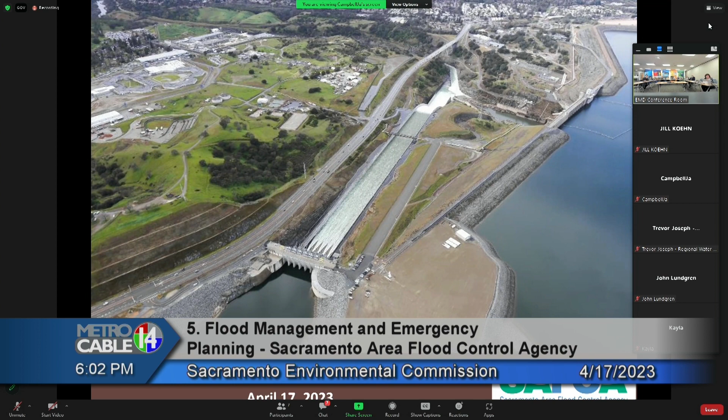What you see here is the Folsom Dam Joint Federal Project. On the left, where the water is flowing down, you'll see a little bit more of this in a few minutes. That's the new Joint Federal Project that allows us to really increase flows during storm events, to evacuate water from Folsom Lake during an anticipated flood or high water event. In the upper right corner, you have the historic and existing Folsom Dam. All of the Folsom Dam components, with the exception of the new Joint Federal Project, are currently being raised.

In just a second here, hopefully this will advance. There we go. So again, when we talk about Sacramento, I think we talk about historic floods. You may have seen these many times, of course - K Street in the 1800s.

Big issues. Leland Stanford was the governor at the time, and for his inaugural address, the story is that he was lowered into a rowboat so that he could go to his inauguration and give a speech. We have quite the history with flooding, having 2 rivers, and the wonderful Sierra Nevadas provide us a great reservoir of water, but it usually comes in the form of snow. Unfortunately, sometimes that snow comes down a little too fast on us.

So we want to make sure that we're not having these types of events in the future - that's what SAFCA is all about. As we move forward, there were 2 significant events that really created the formation of the Sacramento Area Flood Control Agency: the 1986 flood, and an item that came through with the federal government, where local cost share, or non-federal cost share, became a component of federal projects.

So in '86, those two events started to build up and make sure the local community was going to be prepared for dealing with flood improvements over the course of many decades. Those local cost share requirements are important because otherwise the federal government does not necessarily want to participate in other infrastructure components associated with it.

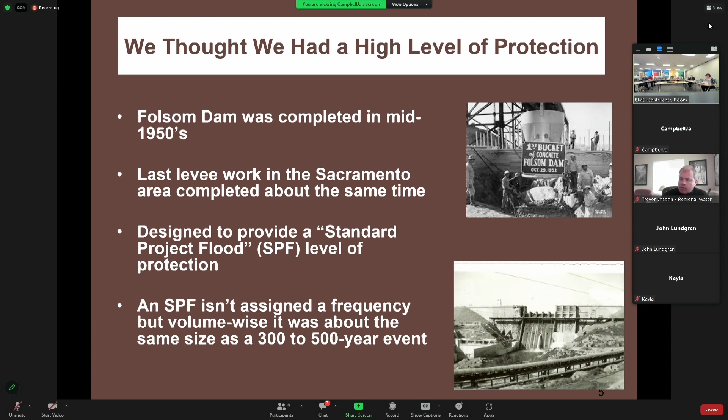At the time Katrina happened, Sacramento was sitting at about a 50 to 65 year level of protection. Before Katrina, New Orleans thought they were at about a 250 year level of protection. So that gives you an indication of where we are, where Katrina was, and how fortunate we have been.

So we now understand our risk is not necessarily fixed based on a specific model, but we have to make sure we have an idea of what flood could look like and how big the storms could be going forward. There have been three major changes in the urban levee standards and a few other things, because this is what we're working on.

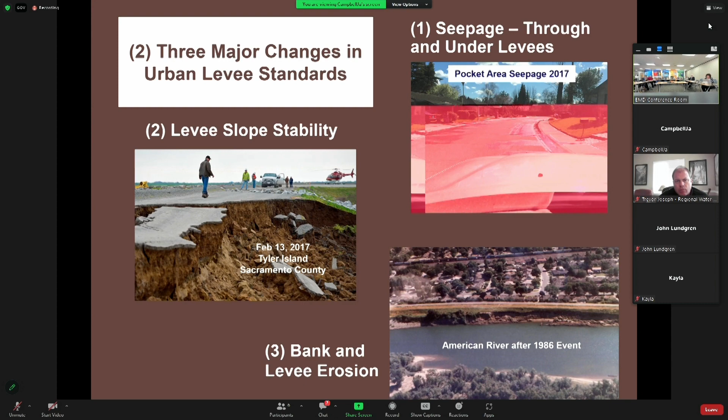These are the three main components on the levee systems, which represent three of the major changes we've seen since the systems were originally constructed. But as we move forward, we have learned quite a bit more.

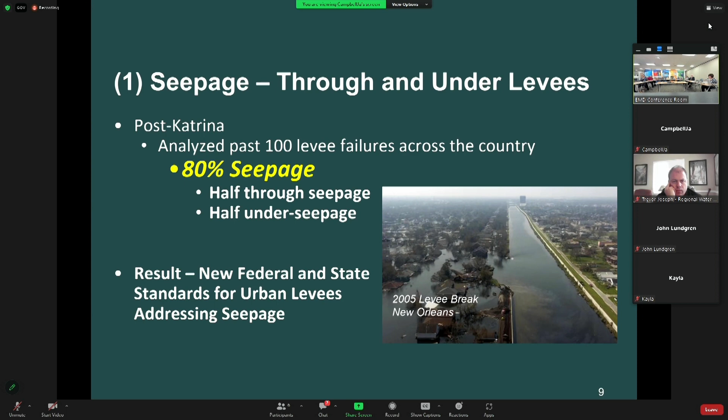Katrina helped us in a few different ways. In some ways it was obviously a major catastrophic event, but after Katrina, 100 levee failures were studied by the Corps of Engineers and other engineering firms, and they identified that 80% of the failures were actually through seepage and under-seepage—water traveling through and taking material with it through the levee, and water traveling under and taking material with it, causing the levee to collapse and fail. This resulted in the new standards that we are now constructing to.

Going back, our levees were originally built from sand dredged from the existing rivers—the Sacramento, as well as some material from the American. They were either brought in using barge, steam-driven barges, and ships that were basically drag-line sand, excavating and putting it into the levee segment.

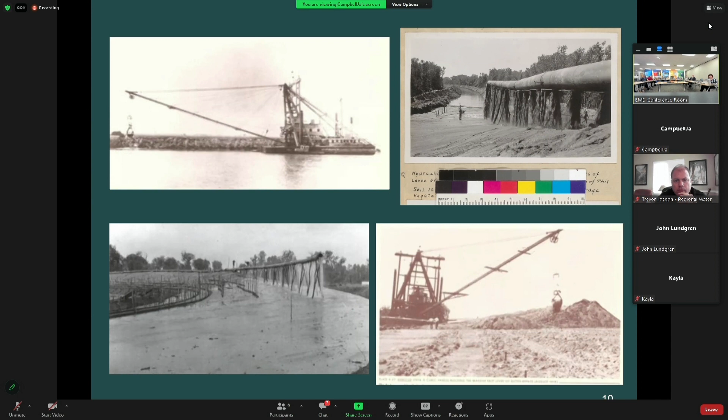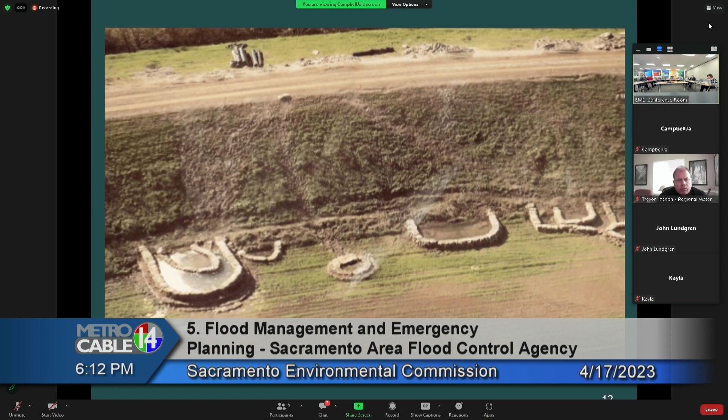We now have a number of different activities underway with the Corps of Engineers, the State Department of Water Resources, and the Central Valley Flood Protection Board, to make sure we're protecting against these things. This is an example of something that was going on in 2017.

Fortunately, nothing major happened here, but a couple things we like to show are that you need room to be able to manage and deal with the problems when they occur. When you get really close to the levee, sometimes it's not as simple to maneuver and take care of emergency operations, like moving material in to fix the levee, or just having simple access for visual evaluation during a flood event.

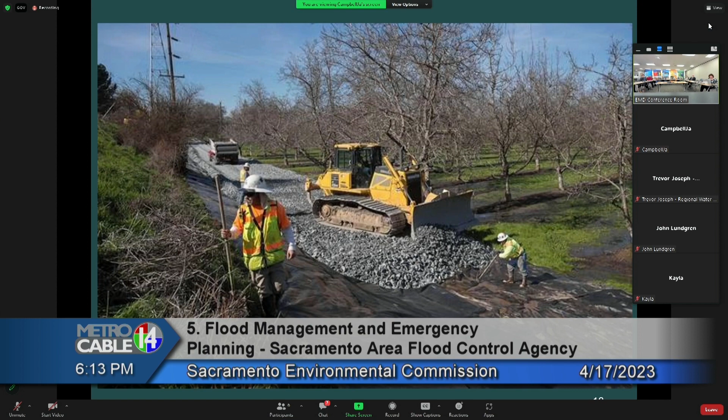So just a number of things here—I'm trying to build up to what our program is.

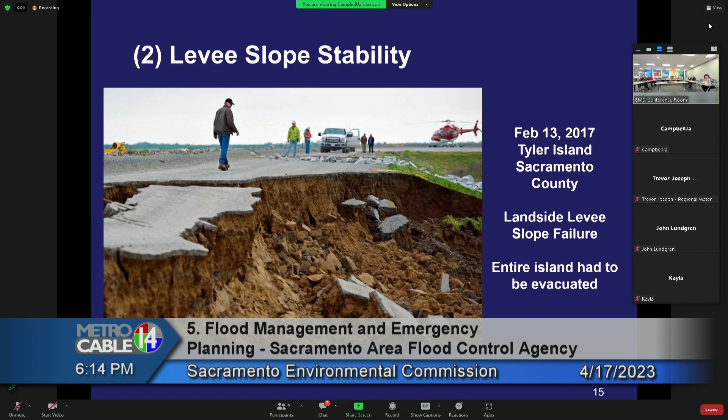As we talk about slope stability, some of these levees have sandy slopes that don't stick very well. This is on one of the islands - Tyler Island was evacuated during the 2017 event. This is an example of where the landside levee just got saturated and fell off. We're constantly working on these types of issues as we move forward with our projects. I apologize again for these pictures not translating very well. But sometimes it's just like what you see on the highways - these slopes, if they get too steep and the material gets wet, it starts to come down. The same thing happens with our levee systems, unfortunately. If those slopes are too steep, the material may fall away and become a problem for the system it's trying to protect.

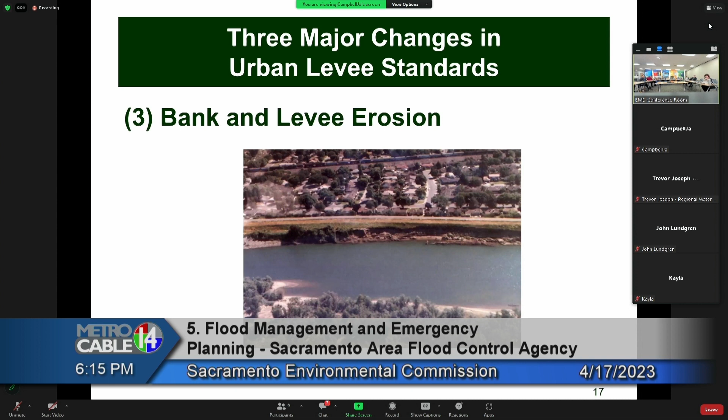Then, of course, we talked about levee erosion. This was the 1986 event that caught us a little bit off guard, but it really tells a story that is causing us to spend billions of dollars along with the programs.

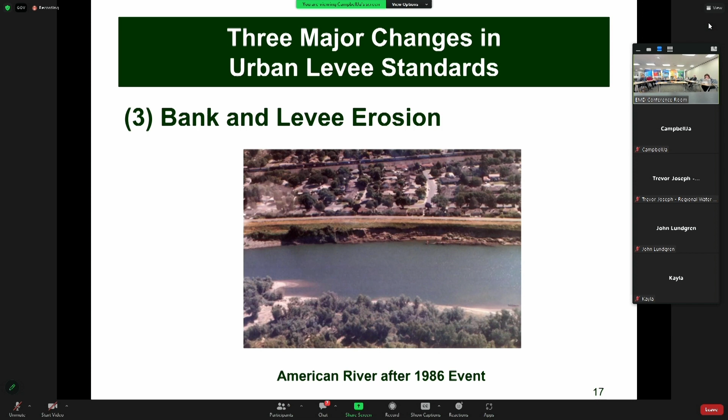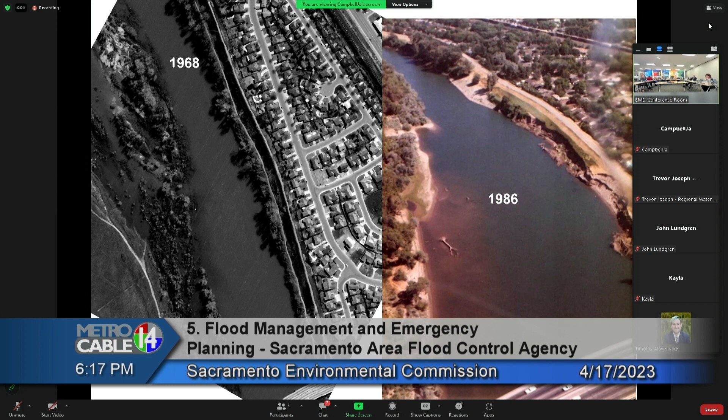So the SAFCA system is built around Folsom Dam, the main reservoir for us on the American River and the main point of flood protection for the community. We have 106 miles of levees and channels throughout the Sacramento area. Natomas is a complete ring levee - it's a giant bathtub - with the American River and tributaries feeding in prior to the confluence with the Sacramento River. Lots of levee systems, lots of effort has gone into making sure all these levees are able to perform, and to provide the components necessary to get FEMA mapping redone and meet the 200-year level of protection with the state of California. So a number of things at play here.

We also have the Yolo bypass on the far left. The Yolo bypass, along with Folsom, is our saving grace. It allows almost 500,000 cubic feet per second. A cubic foot is roughly the size of a basketball, so imagine every second 500,000 basketballs rolling by. That's what we're seeing happen in the Yolo bypass when it's in full mode.

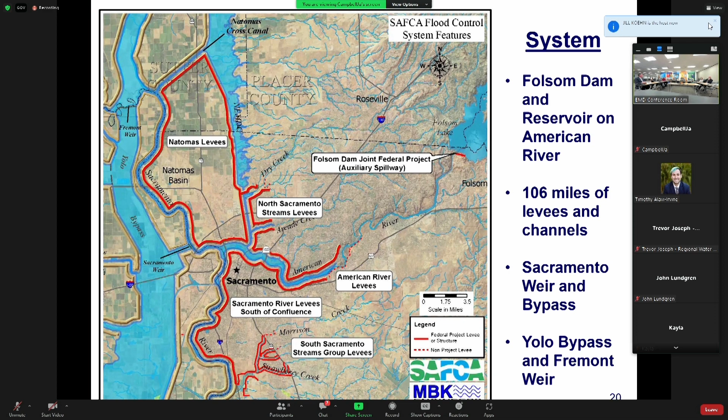So SAFCA, along with the state and the Army Corps of Engineers, has six authorized projects, and all six are funded and active. We have a little bit of... here we go. So we have six active projects, and some of them are approaching completion.

The Folsom Dam actually has three projects associated with it, all part of the same authorization. We are full steam ahead on getting all of our projects moving and keeping them going. Our responsibilities are to make sure the Corps of Engineers has the lands, the easements, the rights of way, and our cost share so they can continue to build their projects.

Currently, the authorizations for those six projects equate to $5.2 billion worth of work. The Corps of Engineers is responsible for $3.4 billion of that, and the state and SAFCA are responsible for about $1.8 billion overall. Those are old numbers, because escalation and inflation impact all of those things, and we're constantly working with our federal partners and congressional members to make sure projects stay funded.

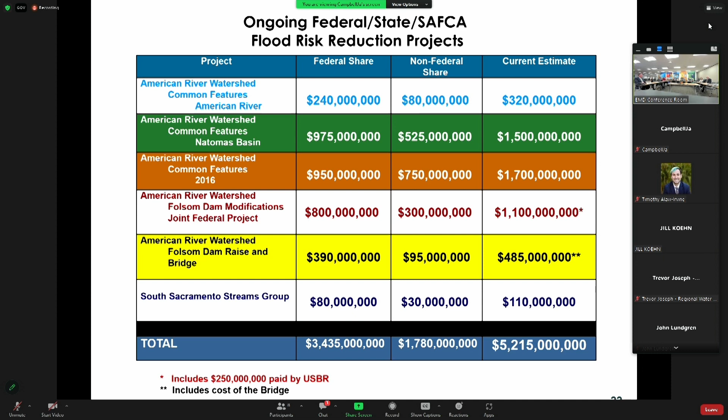So I talked a little bit about cost share earlier. On these authorized projects, the federal government provides about 65% of the overall cost, the state of California provides 24.5%, and SAFCA with local dollars provides 10.5%.

So ultimately, some of you who live in the Sacramento area may see a couple of assessments on your property tax bill. We're fully funded through those property assessments. We don't get any other supplemental funding for our cost share — it's truly just from those property assessments, as well as a development impact fee that covers those costs as well.

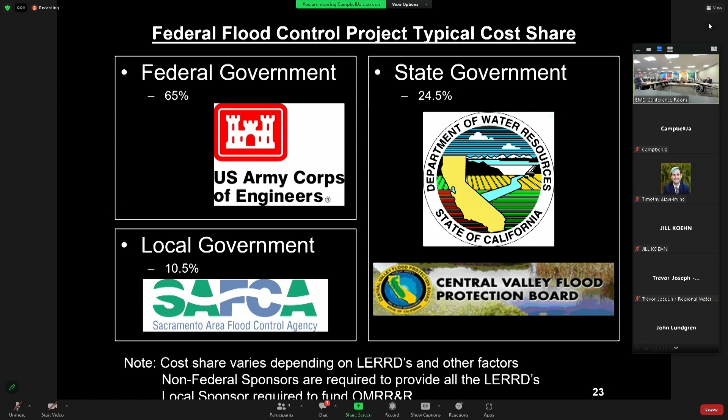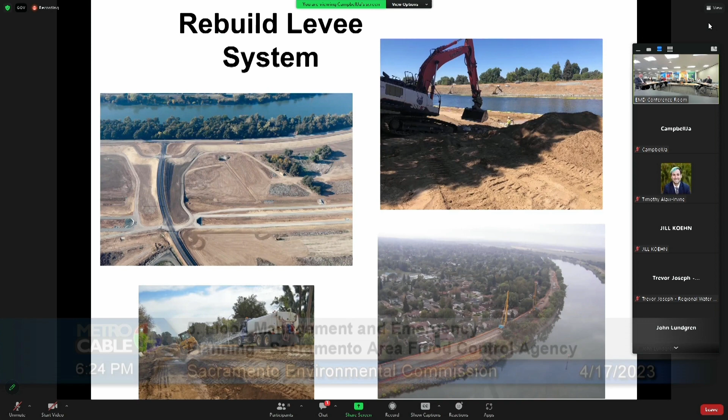You can see the bottom right-hand corner is a little bit different. It looks like something like a crane almost. And what that is, it's a seepage cutoff wall machine. Basically, it's a drilling rig that will drill down into the levee up to 135 feet deep, and it'll provide a slurry system, made primarily of bentonite and soil, some instances a bit of cement. Basically it's to stop the seepage of the water going through the levee and taking material with it, so it's slowing it down so that we can keep these levees intact.

So a number of different types of activities. The bottom right corner on that slide is a long stick excavator. They might go as deep as 80 feet - they might degrade the levee, bring the top of the levee down so they can reach down deeper with this excavator. And they actually just - it's like playing in the mud with the excavator, they will mix it up. Again, different type of method, but same type of effort to protect the system from having that seepage.

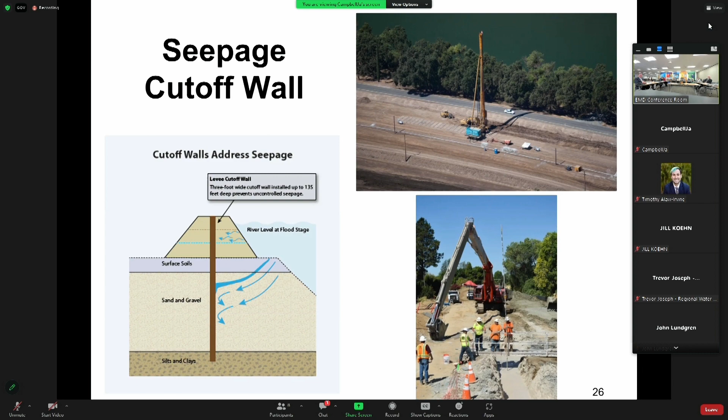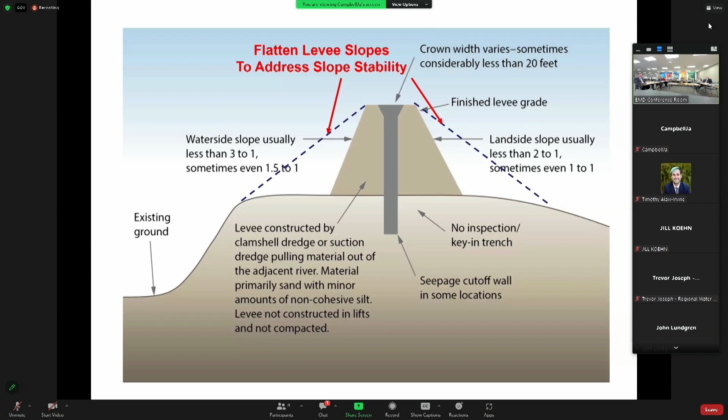Again, we also talked a little bit about the flattening of slopes. Many of the slopes that were created from the original levees were too steep. So as we go through these processes, we're increasing the ability for it to protect against that erosion from the seepage, as well as the sloughing off of the slopes, the soil, and again the erosion.

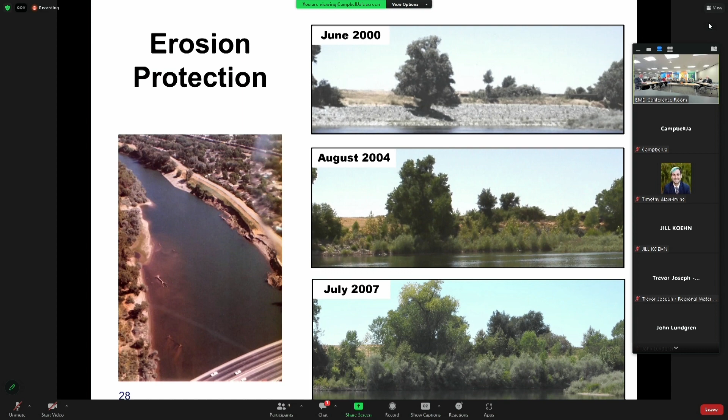And one of the big discussions we have about erosion - the first thing Mr. White asked me today was about vegetation on the levees. And so you could see in the top, shortly after that levee system was protected for the erosion with the rock, it was then also replanted. Soil went over the rock, it was replanted, and you can see over the years that segment of the levee pretty well vegetated. And this is the practice that we are continuing forward with on all of the Sacramento and the American.

So again, I mentioned the Sacramento bypass. The Sacramento bypass is intended to allow flows from the Folsom Dam down the American River and then make that connection so that the flows on the Sacramento River remain the same. I'll show you a little bit more about that - it's a little confusing, but there's a portion of the Sacramento River in a high water event where there's flows coming down the American, it'll actually flow backwards.

So it's kind of an interesting thing on that confluence. The water, if the water level gets high enough on the American, it will push up into the Sacramento bypass, and once those gates are opened, it will flow out into the yolo bypass. The interesting part is we're widening this - we're actually going to double that in the next year. It's going to get started, the bids were just awarded - actually, the bids just were open. Hopefully they will be awarded for the widening of the Sacramento bypass pretty quick.

And this is kind of the explanation as to what I was just describing. So with the Folsom Dam, we now have 115,000 cubic feet per second rolling down the American River. That's our current level of flow that we are anticipating. But with our new Folsom Dam and our new work that we're doing on the American River, that number is going to go up to 160,000 cubic feet per second going down the American River.

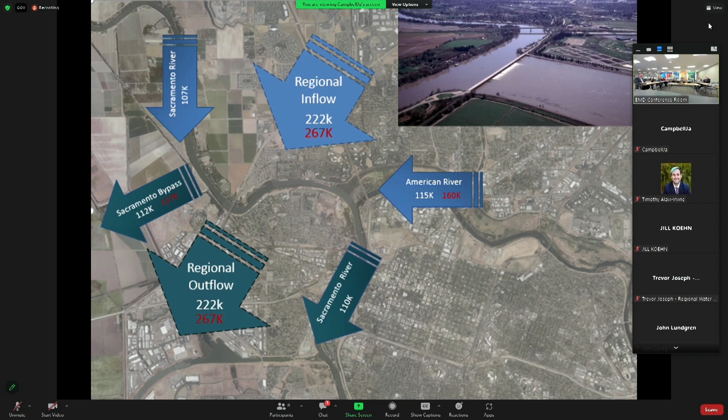So ultimately, we're just trying to make sure that bottom arrow there where the Sacramento River is flowing, those flows stay the same. So again, the flows coming down on the Sacramento are right around 110,000 constantly. Once it gets past the confluence of the American River, we want it to continue to be 110,000 constantly. So when we push more water down the American, it has to go out the Sacramento bypass. It's kind of a weird concept when the Sacramento River for that small segment flows backwards, but it certainly makes it a whole lot better for the rest of the folks down in the pocket area and beyond.

So this is a little bit of what we're working on. The existing green on the left side is the existing Sacramento bypass, that's an operated gate. We see on the news when they get flows high enough, the Sacramento group over for the DWR maintenance office will go out and pull those gates when it gets to a certain level. The new weir, which is going to be going in, is about 1,500 feet long. It's a fixed weir, so no operable gates. Water levels will rise to a certain elevation, and then it'll just spill and go on out into the Yolo bypass.

Included in the project is a very large fish passage, and this was part of the design, so we can get rid of fish entrapments and other things associated with green sturgeon or other salmonids and other types of fish that are near and dear to the community and our hearts as far as making sure that the fish population stays intact.

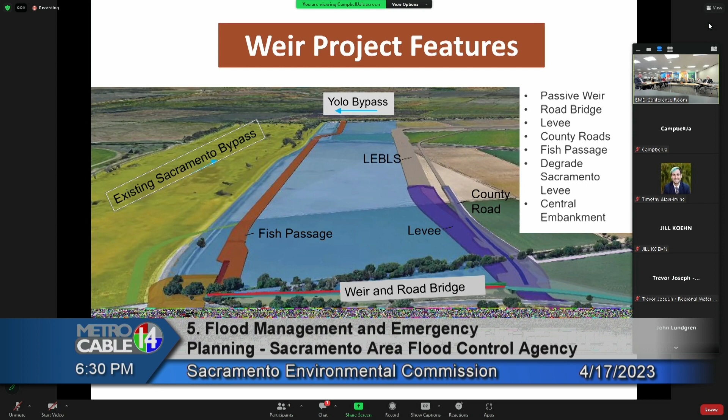In addition, there is a widening taking place of the levee system, not only on the Sacramento bypass here, but up on that corner, there is a widening of the Yolo bypass occurring. This is what's called the Lower Elkhorn Basin levee setback. The state is performing this work, called the LEBLS Project, just because it's a big mouthful. But ultimately, it's the widening of the bypass by about 1,000 feet.

The issue we had was SAFCA had to go in and relocate a landfill that was in the Sacramento bypass. It was an old burn pit landfill, called the Bryte landfill. We worked with the state of California to relocate it, and you can see the relocated landfill is now in what's called a corrective action management unit. SAFCA is now owner of that relocated landfill, and we're going to turn it into a corporation yard for the reclamation district that will be maintaining those levees.

So again, the Sacramento bypass levee is going to take that turn, and then that new Yolo bypass levee is being constructed by the state of California. All under the auspices of getting more water out to the Yolo bypass and then mitigating those impacts in the Yolo bypass for that additional flow.

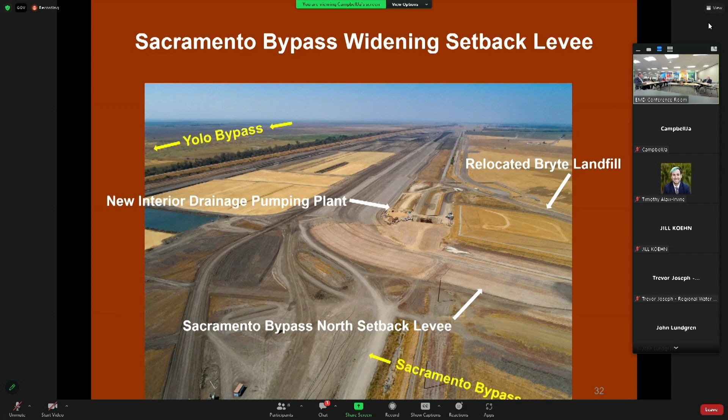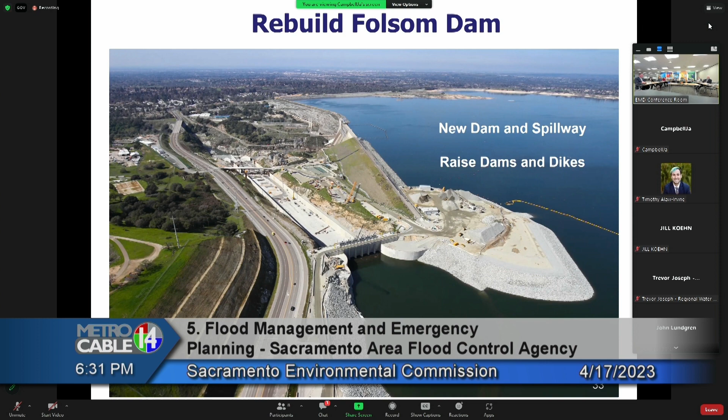I mentioned earlier, Folsom is our first line of defense from the runoff on the American River from the Sierras. So we did have the new dam and spillway, as I mentioned earlier. We're also raising all the dams and dikes around Folsom by 3.5 feet, which will create a little bit more flood storage space. This is the new joint federal project, the new dam and spillway, which has all the gates operational.

I know there was a little bit of news not too long ago, somebody saying something was wrong with the gates. No, the Corps of Engineers had a construction defect on the coatings of the rods, the hydraulic cylinder rods, and the coating wasn't going to live its life expectancy. So there's a little bit of work going on that was just awarded to make sure the coatings on those rods will be replaced. $16 million the Corps of Engineers is paying for that to occur.

But these gates are all operational, and they will remain so, with the exception of one gate at a time each year coming out of service so they can replace those rods. Ultimately, a tremendous amount of water can flow - well over 200,000 cubic feet per second can come out of Folsom between all the gates. We probably won't ever have to get to that, let's hope. But there's quite a bit of capacity and redundancy built into the system.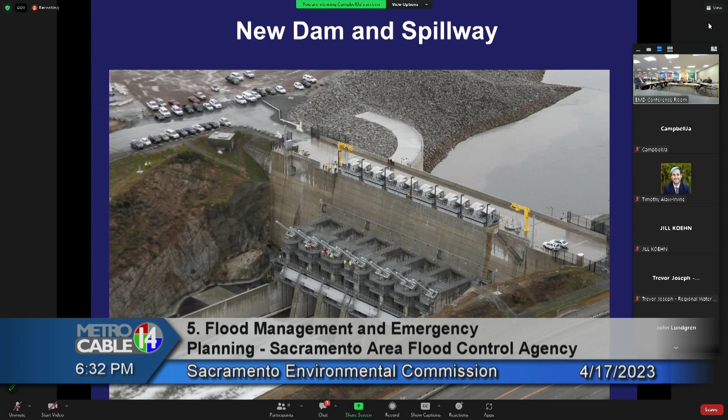When that project was constructed, the discussion was how much concrete went in there. We always like to throw this one out there: 29,100 concrete trucks. We lined them up from San Francisco to Reno, be solid concrete trucks. Kind of an interesting, nice little fun thing, but moving on.

The purpose of that new dam spillway was that we needed to lower the gates 50 feet. The idea is that if you wait too long, if you wait for Folsom to fill up, you can't get the water out of Folsom fast enough to create space for a flood. So when we have big flows coming in, we need to release early, and we'll need to have a whole different works to make that happen.

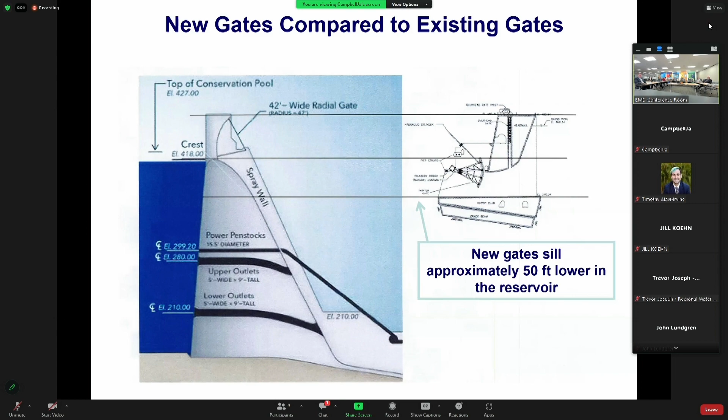So these new gates went in 50 feet below the original dam gates and other infrastructure there. And what that does, this comes through all the way. We have what's called a water control manual that provides us the instructions on how to operate the facility. Basically, the water control manual gives us ideas as to how much water is coming into Folsom and how much needs to go out based on snow melts, precipitation, and expected weather.

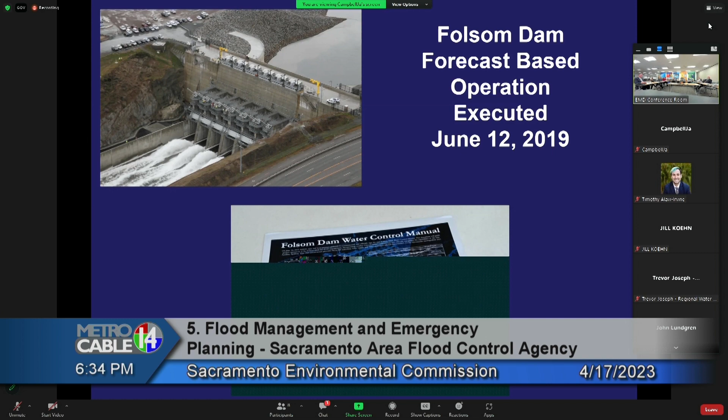So we do a weather forecast. Well, we don't, but NOAA does a weather forecast, and they communicate with the Bureau of Reclamation and a number of other individuals so that we can help identify how much space needs to remain in Folsom so that we don't flood. So this is a very interesting process.

Before the Folsom modifications were done for the joint federal project and that new spillway, every year when we got to December, they would evacuate a bunch of water. They would bring the levels down, taking it to almost 67% empty. And then there's this variable space that you're talking about.

So if we look at the red areas, that's what the old model is, if we're trying to talk about flows here. Folsom has about 1 million acre feet of capacity. We would take it down to about 670,000 acre feet if it was going to be a big year. And then we would hope it would fill back up. It was a model for decades.

The new diagram allows this variable space to get managed a little bit differently based on forecasts and other efforts. Basically what happens is it allows the operators of the facility to hold on to the water a little bit longer and make judgment calls on how much they could fill and how early they can. I'll get a little bit more into that here.

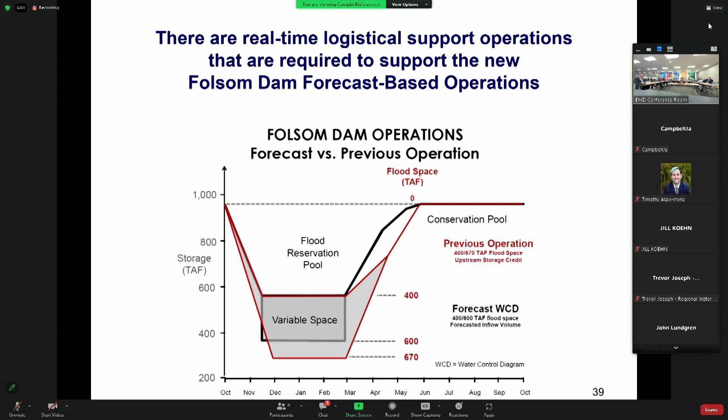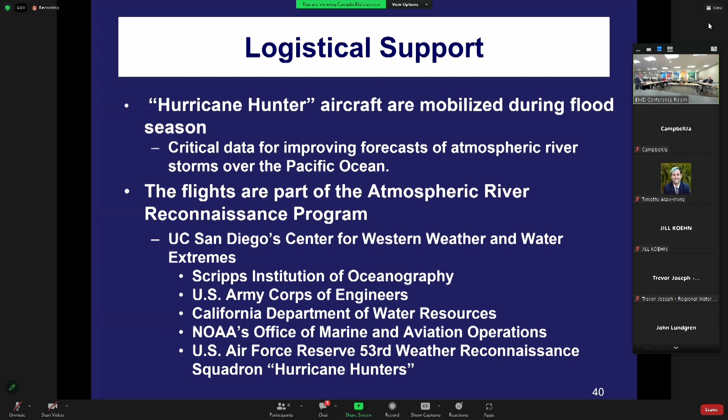Hoping I'm not confusing you all, but along with that diagram, the federal government has instituted a whole bunch of support associated with these new storm events we're seeing. We're hearing about atmospheric rivers and bomb cyclones and other things, and atmospheric rivers are a big deal for us. The federal government now has what they call the hurricane hunters that you see on the East Coast. They now come out to the West Coast and provide the reconnaissance program to help us with forecasting for reservoir operations. These operations are underway with our new water control diagrams, and there are a number of cooperations and other entities involved that help us bring this forward going into storm season.

These atmospheric rivers, on average, we're anticipating carry roughly 25 times the amount of water vapor and water that are in the Mississippi River. So we have a number of meteorologists and scholars that are very in tune to this right now, and it's quite interesting.

I have to say, we were at an event not too long ago, and the forecast for this year was a dry year. It was a La Nina year, and the expert giving his presentation on these atmospheric rivers said, well, we got surprised - we would have never predicted this. That's like with any of our predictions, but there was a volcano eruption in Tonga in January of '22 that put more water vapor in the stratosphere than they had ever seen. So there's some speculation that may be the cause of our atmospheric rivers this year.

It's kind of an interesting dialogue and discussion, but it also supports the fact that we need robust flood protection, because predictions are even sometimes a little scary that things could be coming our way. Something like a volcano erupting halfway around the planet might cause it - I don't know if it's the butterfly effect or what. Anyway, sorry for the digression there.

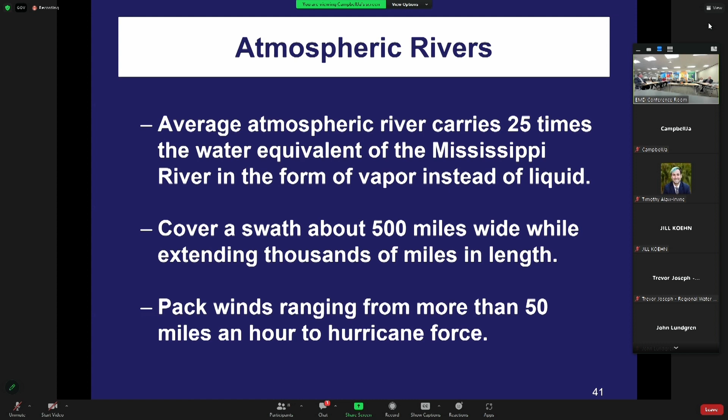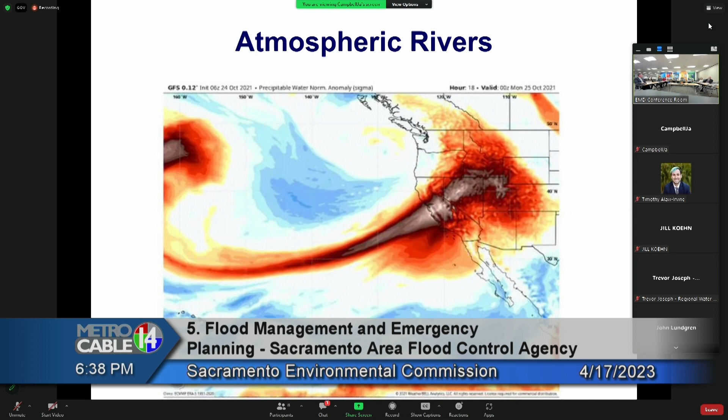We have a number of these atmospheric rivers that come. We're seeing it this year, so I think everybody's probably been paying attention to that. I don't want to talk about that too much more, but this is what they look like. We just have to understand that this is the goal - we're trying to protect the community against these efforts. So we are continuing with the 500-year level of protection. We have these partners with our friends doing the storm hunting and whatnot and helping with the predictions of the weather.

No matter how flawed the systems may be, any good information that we can keep building upon helps us. NOAA and others help us create these plans to manage these reservoirs and other operations.

Folsom Dam is being raised by 3.5 feet. There are a number of dikes, the main dam, and the left and right wing dams. All the structures are being raised. We're about 40% through that process with the Corps of Engineers currently.

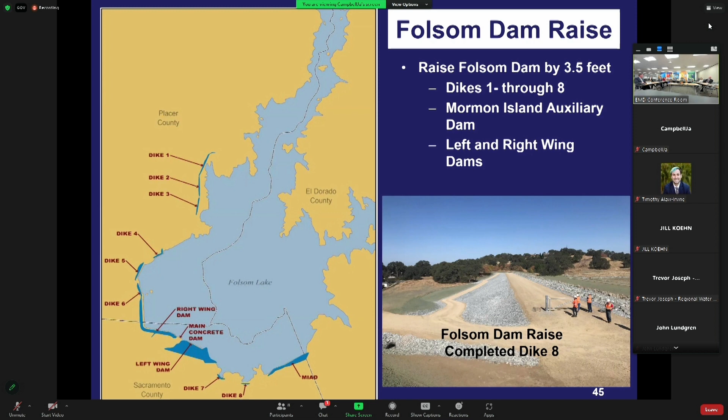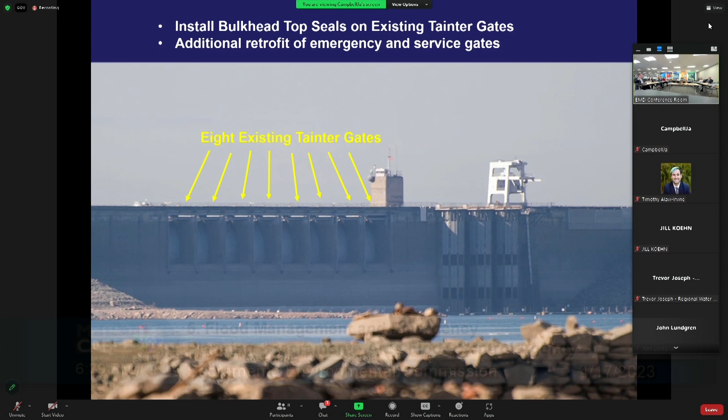Along with that, you can see the original gates on the original dam. You see that little bit of light across the top, probably about 8 feet. So we're putting top seals on those gates so that in a severe weather event, there's more space above those gates so we can hold more water longer. Just anything we need to do to protect the community below.

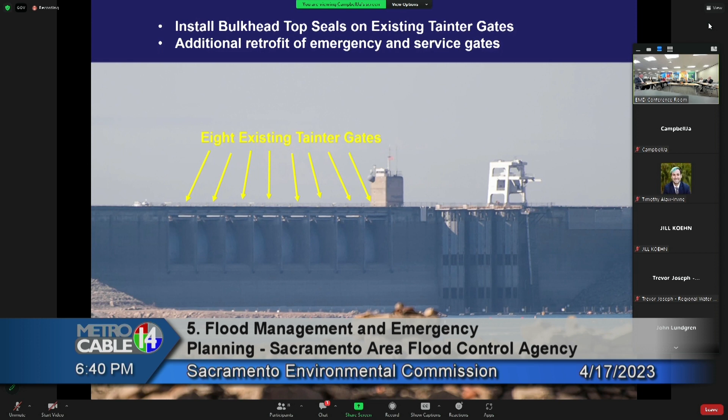The idea is that by sealing those gates, you don't create a dam safety issue where water is falling over the gates or on the backside of the structures and creating problems. That's just a portion of this we'd like to share, that we want these systems to be robust, above and beyond what you might expect through the normal weather being predicted. This kind of talks about where we're at.

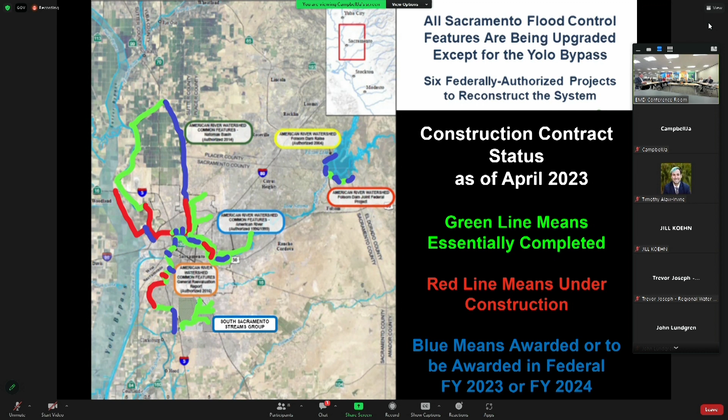Construction contracts—there's a tremendous number of contracts out there going on currently. Every aspect of our system is under construction for those authorized projects. We're touching each and every one of those. You can see most of the construction is either underway or complete. We have a few where the awards are happening now. We're really looking forward to getting all these projects done.

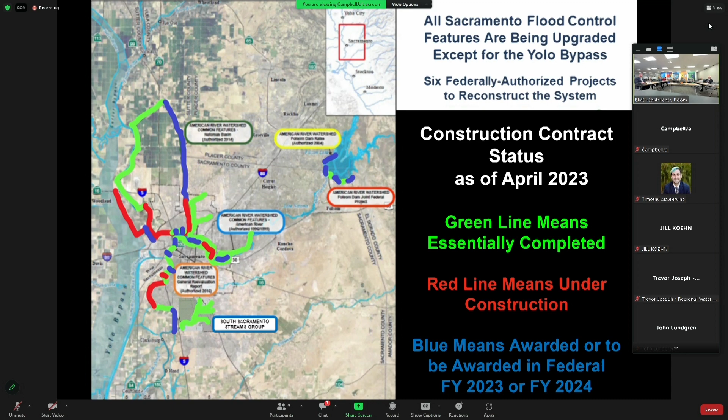Once we're all said and done, we believe that with the projects we have in place currently, moving forward, we will have over 300-year level of protection under the current standards, based on the current water guidelines and manuals.

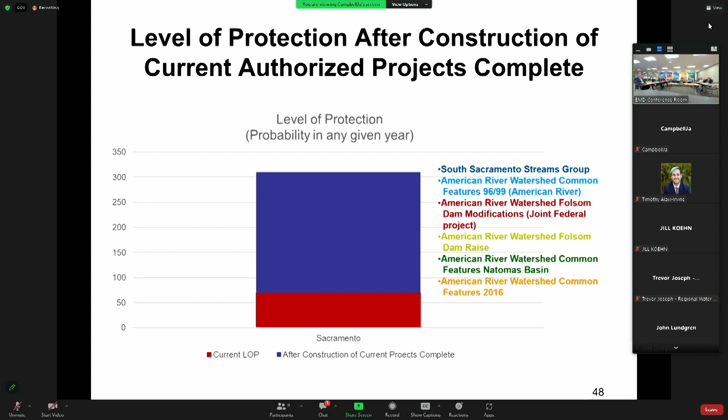But this is the thing I wanted to share a little bit about in regards to our weather and whatnot. For the current year, we've had some pretty decent flows. We all know we've had some good weather, hopefully got us out of the drought completely for a while. But the peak stage on the Sacramento—we didn't get to flood stage in March.

We barely squeaked into monitor stage as you go across there. So you can see the peak stage of the storms this year on the Sacramento was 27 feet, and the other was 28 feet of elevation at the I Street Bridge. The channel capacities—peak flows in the storms were about 79,000 to 83,000. We cap out about 110,000, that's the big peaks.

On the lower American, you can see the two storms. Ultimately, the peak releases from storms coming out of Nimbus were pretty small compared to what we could do. If you just look at the peak inflows between the two storms we've had recently, that's 106,000 cubic feet per second going into Folsom in the December-January timeline, and then the February-March storms had a max inflow of about 44,000 cubic feet per second. Really not a whole lot for us, right?

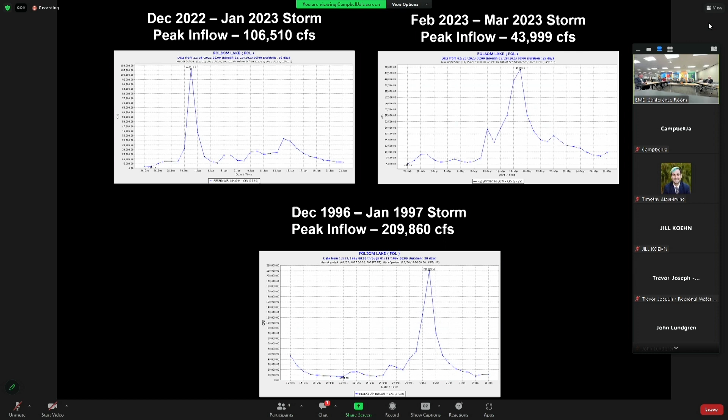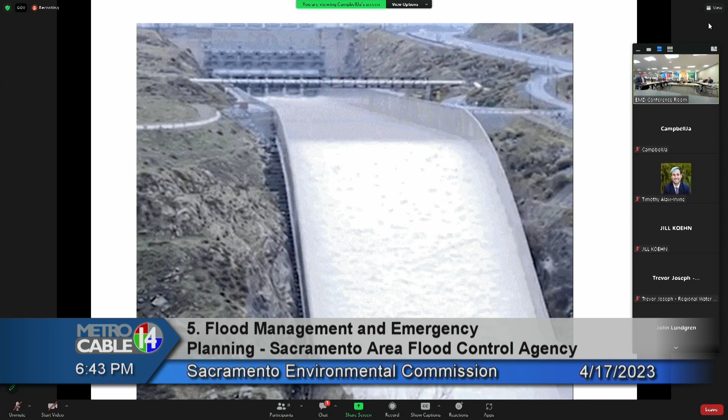Rick likes to show this—he loves the Joint Federal Project. This is about 20,000 cubic feet per second flowing out of the Joint Federal Project. Still, that's not a lot of water in the grand scheme. It's a lot of water, but not a lot for the flows. If you can imagine, we can go up to 160,000 down that spillway if need be.

So just rolling along here, I know I'm taking a bit of time, I apologize. As we get to our forecast informed programs, we start to take a look at this flood pool.

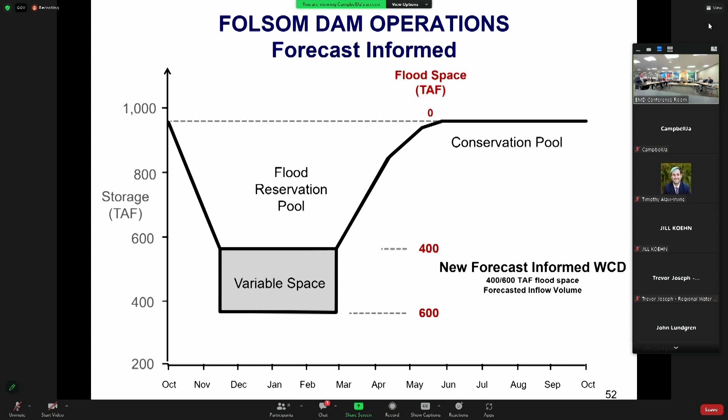So when we get to the top of that gray box, the Bureau of Reclamation is trying to balance. They're trying to figure out where are we at on the calendar, how much room do we have. We've got a huge snowpack, we've got to maybe make some room.

So this is a great example, the first real example that we've been able to share since we started these operations. If you follow that red line, it looks like the image I was just showing you, and you can see right in the middle where all the blue and the red start to mix together.

So the Bureau of Reclamation took it down to the top of that gray box on the previous slide. Here, I'll just go back. They took it to the top of that gray box in that variable space, and you can see it following along.

Then we get to those storms right around New Year's. You can see they started to dig a little hole in that red line, just a little dip down. They were releasing water in anticipation of more forecasted flows based on the snowpack, the temperatures, and what's happening. And you can see those flows came in, that blue line, and the red line bounces back up to where that flood pool top elevation is.

And then we got another storm. So they dug another little tiny hole, trying to manage and equate how much room do we need. Because we don't want to release too much water, but we also want to make sure we're not holding too much back. So you can see how this is actually functioning.

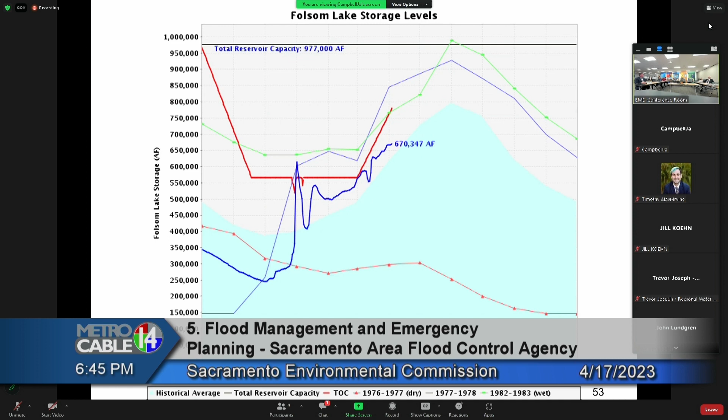I apologize, I don't remember the date of this document, but it's like last week sometime. Anyway, you can see now we're well above. As we get closer to April, they're starting to fill the reservoir again. We're getting out of the flood season. Even though we got a massive snowpack up above, the Bureau and the partners recognize that we're in good stead, we've got space to handle the waters and flows coming in.

But the anticipated flows coming throughout the year are going to be probably three times what they would normally be in a September timeline. We still might see 3,000 cubic feet per second going down the river when we're usually less than 1,000. So it's a considerable amount of water being held. But again, a lot of activity, protection, influence from others, effort on the federal government side, a lot of money. We're starting to see some results here. It's looking promising.

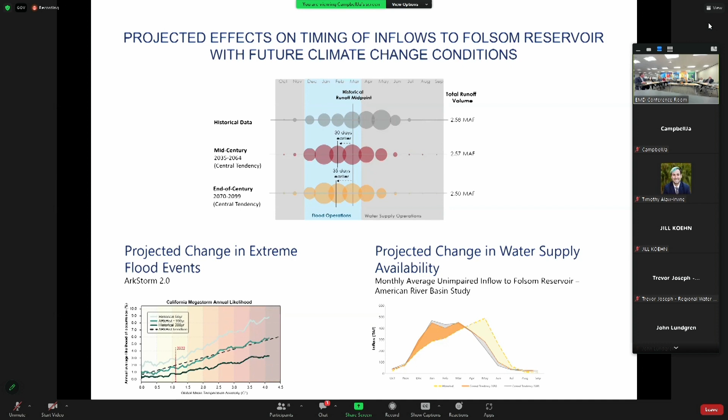Our major components—planning to improve the system to handle a 500-year event—is a surrogate for saying we need to build capacity and capability to handle these big events. We haven't seen a 500-year event, but a 500-year becoming a 200-year, these changing dynamics about how much water we're going to see, we need to keep an eye on the ball. We're going to stick at the 500-year mark and keep marching toward that, continuing our efforts to keep these system improvements going.

The major components—we put together a plan in 2017. These components protect the American River Channel. We've got to get those flows up to 160,000, so we need to widen the weir and bypasses, and we need to arrange for flood storage in the upper watershed. That's something we haven't talked about yet. As we get above Folsom, we look at the different reservoirs above. These are not reservoirs that are part of our normal system in the sense that we have any function or operation over them—they're private.

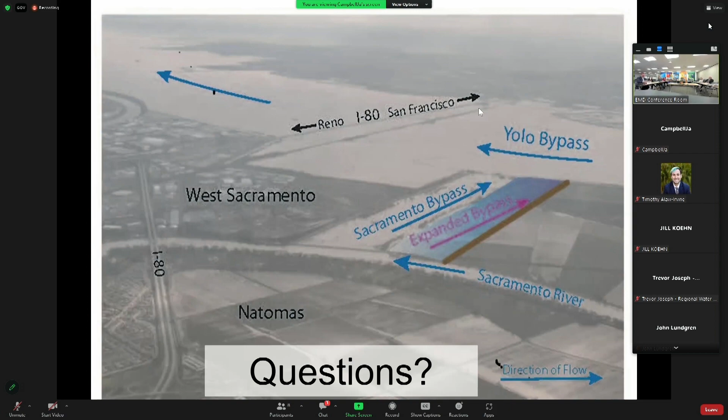So we're having conversations about increasing different operations, similar to what we're talking about with Folsom—making changes to the Folsom operation that includes some modifications potentially to how those operations of those three reservoirs occur, whether there's new dams or gateworks or anything above needing to be done. We're working with those partners to study that, and they would also need different operational changes that would allow them to release or hold depending on the situation, based on forecast-informed systems.

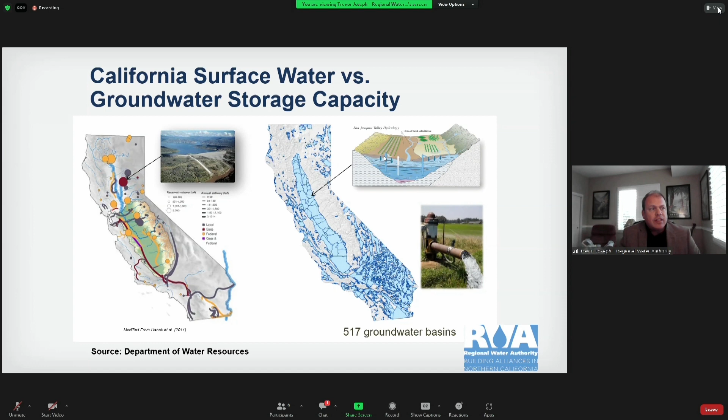With groundwater, as I mentioned, it exists kind of in this trough of sediments. Again, the Central Valley is this really huge trough that's been broken into many different subbasins, but really is connected in terms of the flow of water.

And then all these other blue areas are also groundwater basins throughout the state. The non-blue areas are those more hard rock geology—obviously the Sierra Nevada's coastal range—where not really any meaningful amounts of groundwater exists.

Amazingly, all these tiny little basins out here in the desert area, the Mojave, they are technically groundwater basins and have groundwater, but really there's almost no use of groundwater in those areas.

So when we look at surface water—and I'm a groundwater person, so I'm always comparing groundwater favorably against surface water.

Surface water—all of the major surface water systems in California, this is borrowed from the Department of Water Resources, I used to work there years ago. But when you add up the capacity of those major surface water reservoirs in the state, it's about 50 million acre feet. And of course, the prior speaker spoke in basketballs—one cubic foot.

With water supply, it's in acre feet, as you might be familiar with, which is really an area of a football field flooded 1 foot deep. So that's an acre foot of water—1 acre foot. So all the reservoirs can hold about 50 million acre feet.

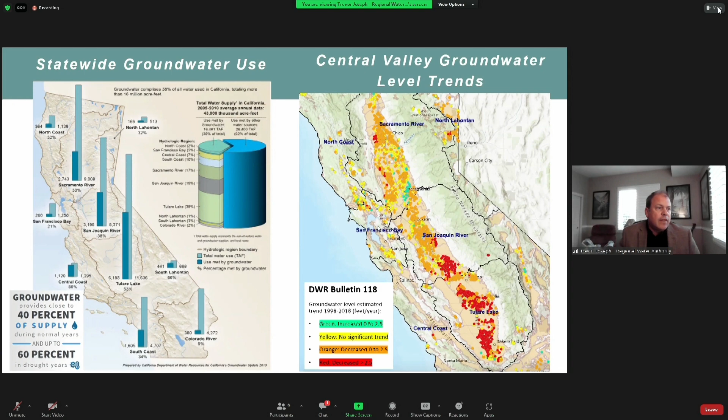So I'm going to switch over to the Sustainable Groundwater Management Act. By a display of hands, how many folks have heard of SGMA or feel they know a fair amount about SGMA? All right, fairly quite a few.

So I'm not going to go through all the detail. I actually worked on the regulations, not the law, but I was the first employee hired at the Department of Water Resources to help grow the group. My responsibility for about a 3-4 year period, until I left, was to get the regulations in place and some of the early implementation activities going.

So with SGMA, really the key here is that local agencies are encouraged to manage groundwater. And if they can't, then the state board can enforce the management of groundwater or take over the management of groundwater. The state board - not the Department of Water Resources - would be the one enforcing a potential management of water, but only after the Department of Water Resources makes a determination of whether local agencies have essentially come together and developed a groundwater sustainability plan that will adequately maintain or achieve sustainability over a 20-year period.

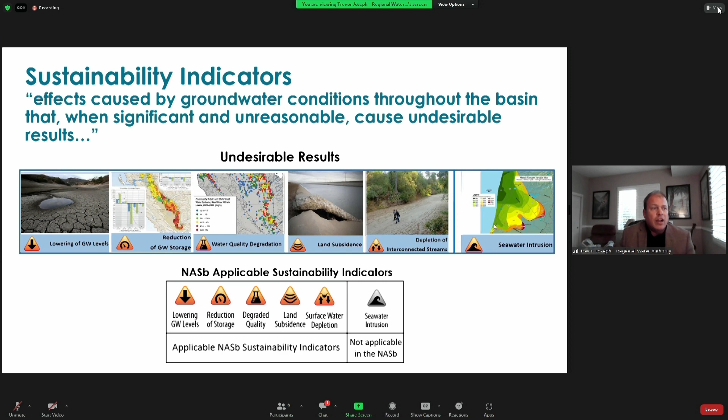So under SGMA, sustainability is defined through what are called sustainability indicators: chronic lowering of groundwater levels, reduction of storage, water quality degradation, land subsidence, depletions of interconnected streams, and seawater intrusion. These have been coined the 6 deadly sins of SGMA. If you are having significant and unreasonable levels of negative effects, as stated in the law, related to these, then you are not sustainable.

And you need to either correct those, or if you can't, the state board may step in. For the North American Subbasin - the basin that I manage, just north of the American River all the way up to the Bear River, I'll show a map in a minute - there's no seawater intrusion. So we're left with 5 deadly sins, as every basin throughout those 107 has to address and avoid these. That's the metric for how sustainability is defined, and I repeat myself because that's really important.

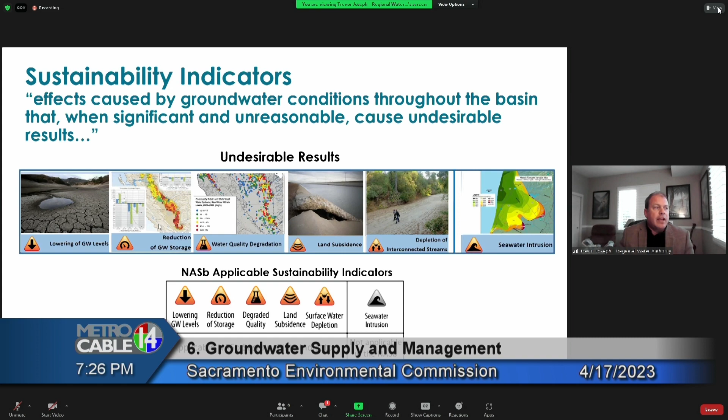So it's not just some sort of mathematical exercise of a water budget or balance for the basin, although that's important - this really gets at site-specific impacts and ensuring that these beneficial users of groundwater, shown here, have their considerations met to the extent possible in managing groundwater.

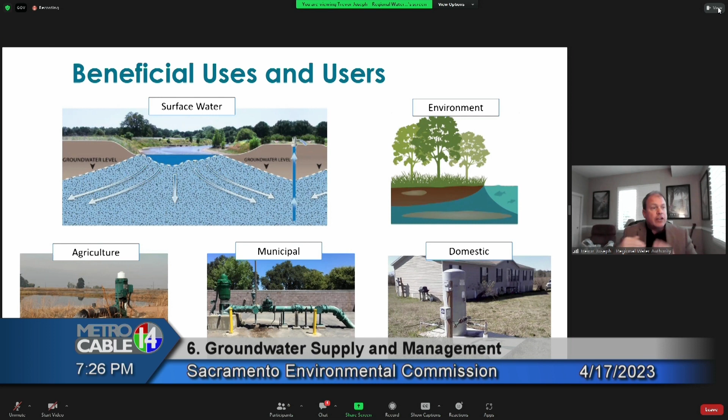So there's agricultural, municipal, and domestic users, and the environment, normally found in groundwater dependent ecosystems - plants and aquatic life that need a groundwater table high enough to interact with and maintain that plant life. Surface water depletion can also have an environmental impact - this is the situation where groundwater pumping occurs where there's interconnected surface water and groundwater, where you're actually pumping groundwater that draws water from surface water features and either causes negative effects to the environment or affects downstream users of that surface water.

Those downstream users obviously do not want agencies to pump all their groundwater and be left with less surface water that they may have a right to. So those are the beneficial uses and users that need to be considered.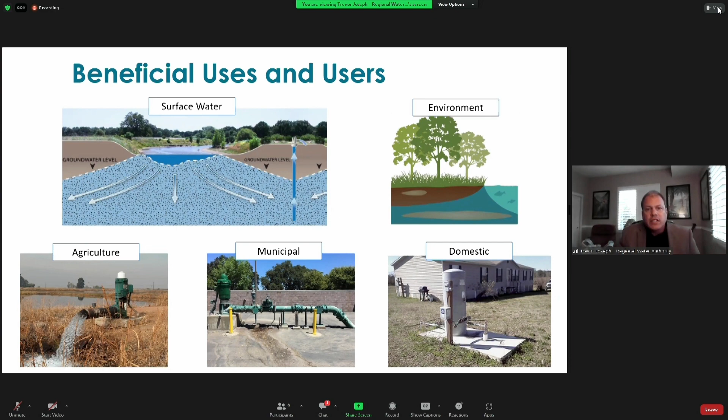I won't go into the details of a groundwater sustainability plan too much, because many of you have probably participated in the development or worked through that process with different groundwater sustainability agencies. But again, those 6 deadly sins of SGMA, determining what levels and how that's going to be managed, is really important - getting that right in those plans.

So I'm going to share a little bit, because when I'm wearing my Sacramento Groundwater Authority hat, I'm managing this groundwater sub-basin with 4 other groundwater sustainability agencies. I work for the Sacramento Groundwater Authority, this green area, but working with these 4 other GSAs, we're managing - and we're the lead agency, if you will, with DWR.

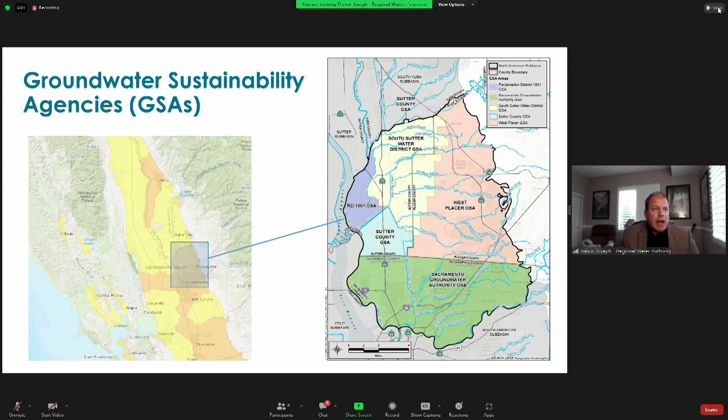We're all collectively the same in terms of hierarchy, but we're helping administer this on behalf of these agencies. This is bound by the Bear River, the Feather River on the western side, the Sacramento River, and of course the American River. This contact here on the east is where essentially the foothills, the granitic rock and other hard rock, meets the groundwater basin.

I wanted to just again display how that chronic lowering of groundwater levels, that sustainability indicator, that one deadly sin of SGMA, how important that is.

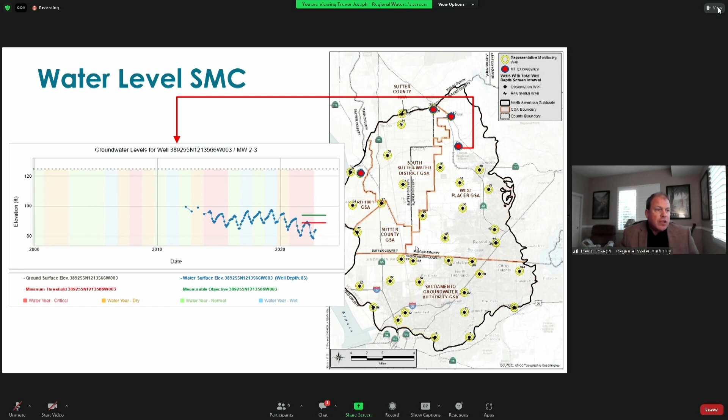In the regulations, what's required is that agencies define minimum thresholds at different locations. These yellow dots are monitoring wells. We have 41 monitoring wells throughout the entire basin, and for those wells, as required by the regulations, we've set minimum thresholds.

Unfortunately, what's not a good sign is this declining trend, and we're seeing it only in a couple of spots. But in those couple of spots, after 3 years of drought, we've turned these wells red because they are exceeding the minimum threshold. That threshold is important because we feel this level is necessary to maintain, whether for groundwater dependent ecosystems, domestic users, or others.

Luckily, we have not seen any impacts. So we may or may not have that level right, but it's something we've been watching closely because, after 3 years of drought, even in a basin we feel has been fairly stable in terms of water levels, we're seeing a couple of problems.

Now, this does not create an unsustainable condition in SGMA. We are not going to the state board because we have a couple of wells with minimum threshold exceedances. But again, it's something we've been keeping our eye on.

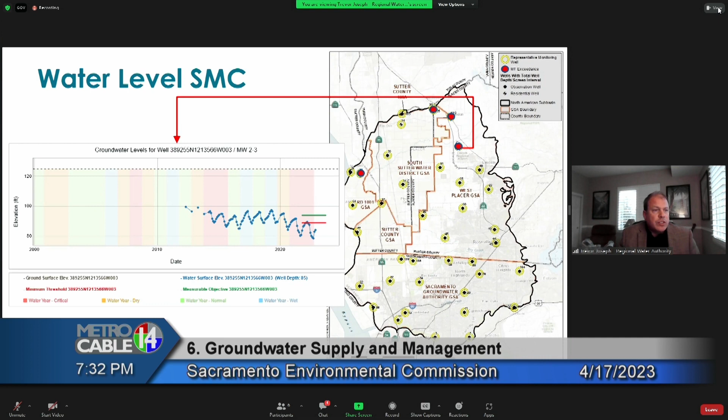Now we're so thankful with this wetter hydrology - we've gone out there, raced out there, collected some additional data, and these wells are no longer red, meaning the water table has come back up above this line. I think it's going to come up pretty significantly with all the natural recharge we should receive this year because of such a great rain season.

A couple other techie images, and then I'll move on to the next topic. This shows the same basin. The darker blue areas have more significant groundwater pumping. The lighter blue is less groundwater pumping, or maybe none at all. That doesn't mean water isn't served to those areas, but it's largely surface water fed to those lighter areas. This basin is a mix of about a third urban and two-thirds agriculture.

The urban areas, as you're familiar with, are the greater Sacramento area, Roseville, and Lincoln - those are the major urban centers. We do have some ag in the Sacramento County portion, but not that much in comparison. Some heavy ag is in the Sutter, Placer area, and that's very logical - you'd see more groundwater pumping there since they don't have surface water deliveries in some of these areas.

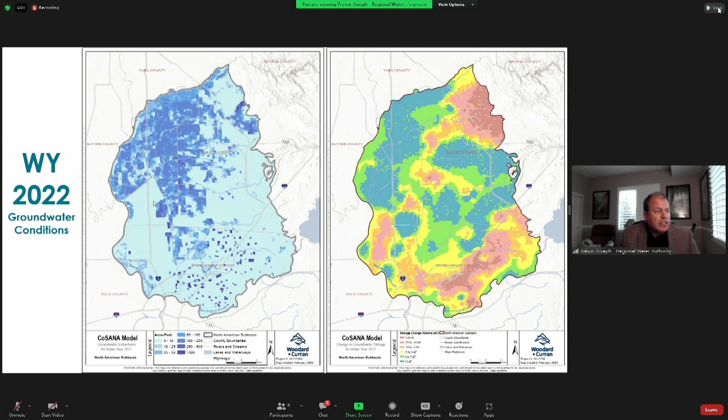This is change in storage from one year to the next, 2021 to 2022. This means we've seen - not necessarily the water table drop, but in some cases we have, since I showed red dots indicating water level declines in this vicinity. This red correlates with those water level declines. But this change in storage means we saw more pumping than last year in these areas.

Red means greater than 20 acre feet, not in the whole area but in these small shapes. The Sacramento suburban, some of these districts did pump a little more groundwater than the prior year, which seems very logical. This concerns me because this is the Sheridan area, and they already have some water level declines.

But we've also seen water levels come up, or a positive change in storage, in some areas.

So in general, this graphic equates to the change in storage year by year. After 3 years of drought, that map showed some red, some blue, but on average it was essentially zero. We saw a zero change in storage last year, which is amazing after 3 years of drought.

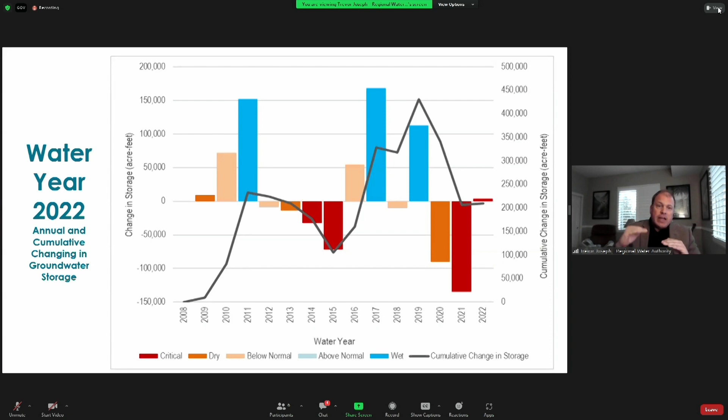That's again a function of surface water features recharging the basin. Not to take light of the prior speaker, but as long as flood events don't cause damage, we get to benefit from some of that recharge. That dot map I showed you previously correlates with this - we're seeing a positive change in storage, and in many areas of our basin water levels are coming up.

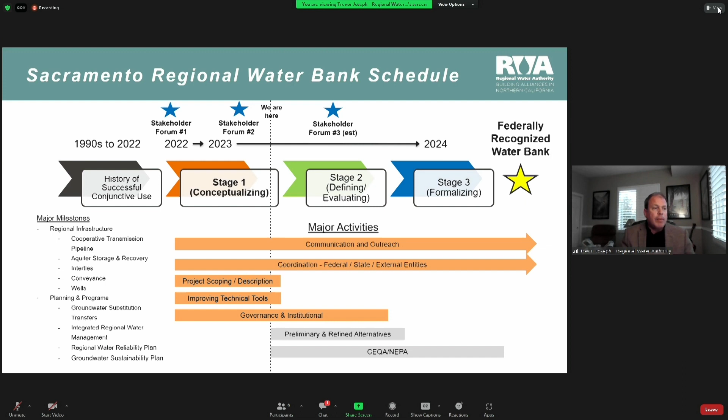So I'm going to dive into the regional water bank real quick. This is a project where 19 agencies in the greater Sacramento area are contributing and have hired the Regional Water Authority to develop it. Essentially, it's a bit complicated, but it's operating more conjunctive use - shifting between taking surface water in years where it's more plentiful, and shifting to groundwater in drier years, leaving precious surface water in our rivers and streams. It's a shift from their prior baseline operations. The process involves a lot of different activities to develop the water bank, and we're hoping to do so in the late 2024, early 2025 timeframe.

With artificial recharge, there's injection wells, aquifer storage and recovery, which the city of Roseville and the city of Woodland do - I used to work for the city of Roseville and helped get their system established. There's also percolation ponds, where you're diverting water from streams and creeks into recharge ponds and letting it percolate into the groundwater system.

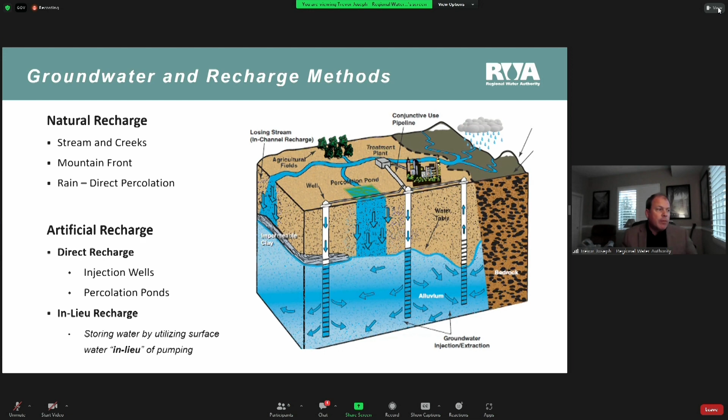And then there's in-lieu, or conjunctive use, which is shifting to more surface water when it's plentiful, letting the groundwater table naturally recharge, and then shifting to groundwater when surface water is more scarce, drawing that groundwater table back down. So you're doing in-lieu recharge.

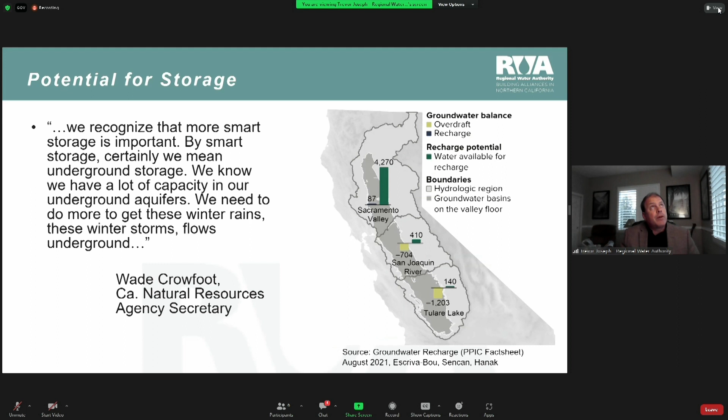This information was from the state of California and the Public Policy Institute of California, which put together this graphic. There are no units shown, but it identifies the amount of water available for recharge throughout the state, showing 3 of the hydrologic regions. Mainly due to surface water features, it's estimated there's more than 4.2 million acre feet of water that could potentially be used for recharge - water that may flow out of the Golden Gate and be lost without use.

Now, there's a lot of devil in the details here in terms of making sure there's adequate supply for the Delta, and I don't have all the data to show specifically how those needs are met. But the point is that there's opportunity to recharge our basins and utilize surface water that could be, or is, lost.

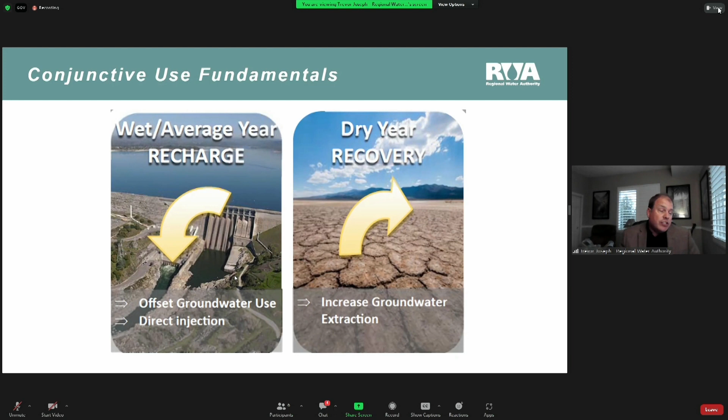And again, it's the inverse - there are agencies that are maybe solely surface water agencies, and if surface water is limited, we try to shift those agencies to groundwater use. Or for agencies that have both capabilities, we again shift their use. I'll explain how much water we think this can make in the slide after this.

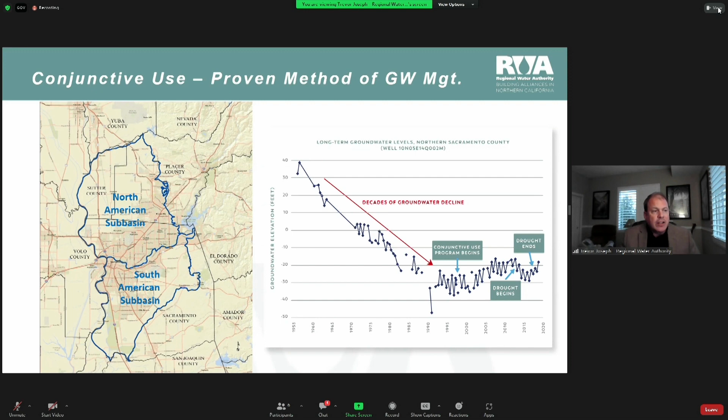Conjunctive use has been very successful in the North American subbasin, and portion of the South American as well. How that's been successful is we had very declining groundwater levels - not unlike what is still being experienced in the San Joaquin Valley for decades. The decline was heaviest, and still is, leaving a cone of depression in the northern Sacramento County area, kind of in the North Highlands, McClellan area of the Sacramento Groundwater Authority area.

Then a surface water pipeline was brought in during the mid-90s, and that's a form of conjunctive use. That pipeline bringing water into the middle of the basin enabled agencies to get off groundwater, reducing this negative decline. Since then, the basin - and this is only one well, but it's indicative of a lot of wells in the central area of the Sacramento Groundwater Authority - we've seen stable and even slightly increasing groundwater level trends. So conjunctive use is a proven method for not only maintaining a sustainable condition in terms of water levels, but also banking of water.

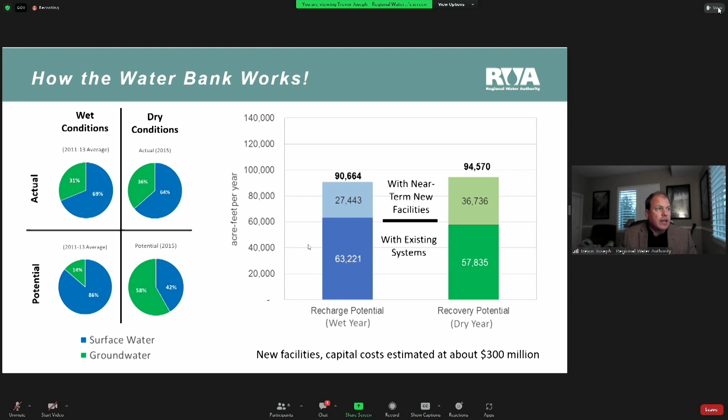So I know that was a lot. I want to thank you, and hopefully I didn't go too long. I don't know if there's time for any questions or comments. Oh no, thank you so much, Trevor, for that important information. So do any of the commissioners have any questions for Trevor?

I have one. When you talk about the in-lieu strategy, which wouldn't require any more infrastructure, what is stopping that from happening on a larger basis? Like, what are the blocks you're running into? Yeah, it's existing infrastructure to get those volumes. In some cases, the operators are just not familiar. If they're used to operating surface water facilities, or conversely groundwater facilities, there's a learning curve in terms of making that transition.

There are aesthetic challenges with groundwater, especially in urban environments. If you've had a lot of surface water, and groundwater, although it meets all health and water quality standards, there's always a kind of public relations and community concern in some areas, an aesthetic difference with groundwater, which has more total dissolved solids. So that's always a bit of a challenge. And then the big one is financial incentives. In many cases, groundwater is cheaper than surface water, or conversely in some instances. So getting agencies to switch to a different source of supply can come at a cost, often a financial cost.